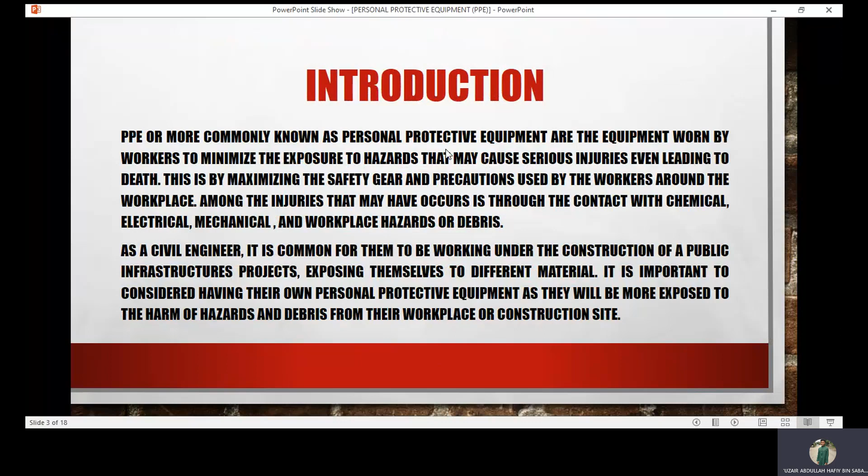As a civil engineer, it is common for them to be working under the construction of public infrastructure projects, exposing themselves to different materials. It is important to consider having their own personal protective equipment, as they will be more exposed to the harm of hazards and debris from their workplace or construction site.

So here are the types of personal protective equipment, that is PPE. First is the safety helmet. Second is the protective gloves. Third is hearing protection. Fourth is the full face shield. Fifth is safety goggles. Sixth is respiratory protection. Seventh is the safety boot. Eighth is protective clothing. Ninth is the reflective vest. And tenth is fall protection equipment.

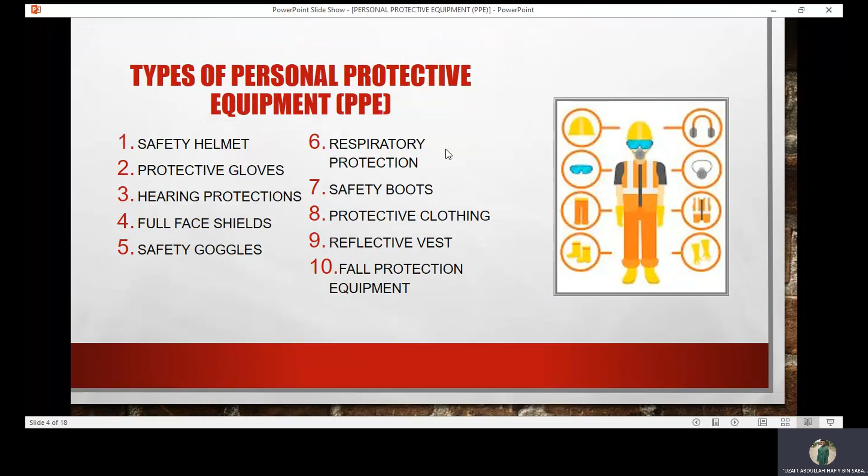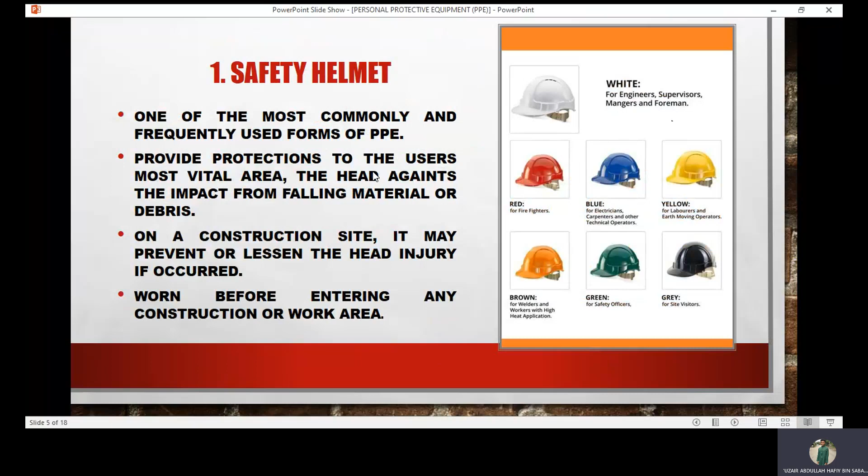First is the safety helmet, one of the most commonly and frequently used forms of PPE. Many engineers wear the white type of safety helmet, as it represents engineers and provides protection to the user's most vital area, that is the head, against impact from falling material or debris. On a construction site, it may prevent or lessen head injury if occurred, and it is worn before entering any construction or work area.

Next is the protective gloves, which are designed to keep the user safe from hazards of cuts, burns, crushing, or contact with any biohazards. It is worn during work or projects and covers and protects the hand from the wrist to the fingers. It works in saving one's hands from any sort of injury that may occur physically.

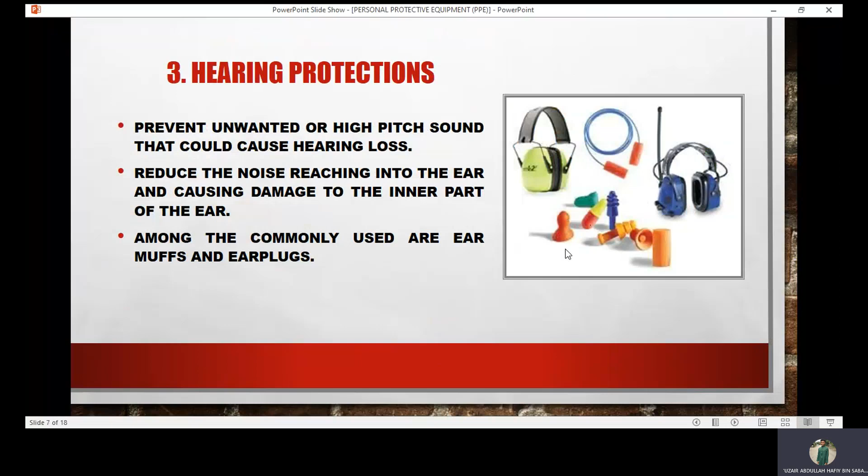Next is the full face shield, which works as a secondary protector intended to protect the entire face of the user against exposure to impact or hazards. It is used in combination with safety goggles to improve the ability in protecting the user's face. It is made with different transparent materials with varying levels of thickness in order to protect the face.

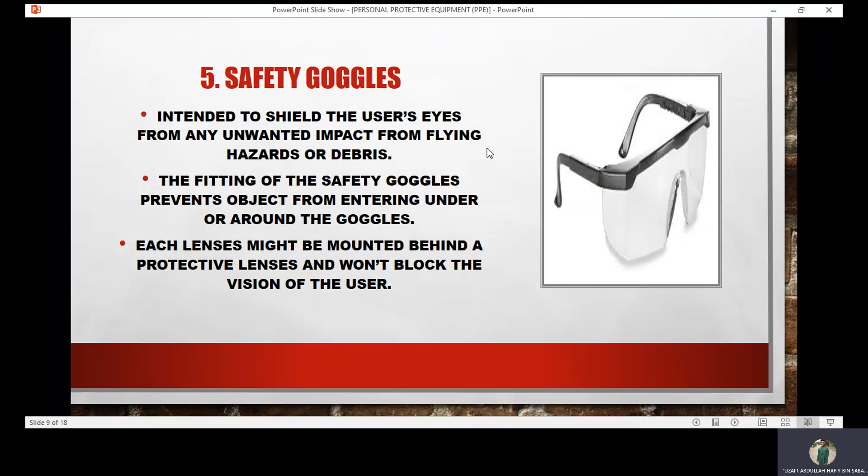Next is the safety goggles, which are intended to shield the user's eyes from any unwanted impact from flying hazards or debris. The fitting of the safety goggles prevents objects from entering under or around the goggles. Each lens might be mounted behind a protective lens and won't block the vision of the user. These safety goggles are worn together with the full face shield, as it could improve the safety ability.

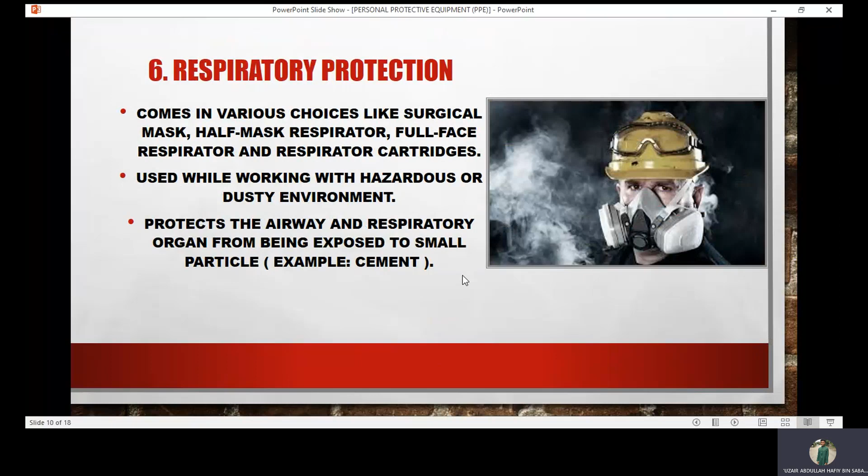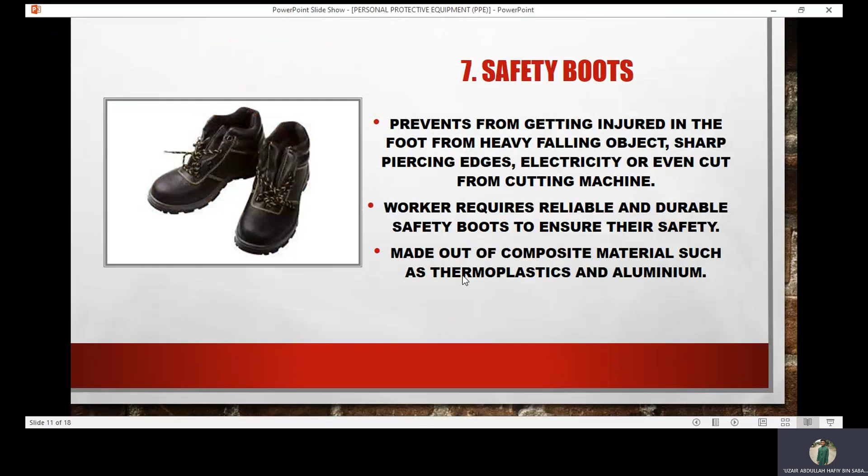Next is the safety boots, which prevents from getting injured in the foot from heavy falling objects, sharp piercing edges, electricity, or even cuts from cutting machines. Workers require reliable and durable safety boots to ensure their safety, and it is made out of composite materials such as thermoplastic and aluminium in order to make it more durable.

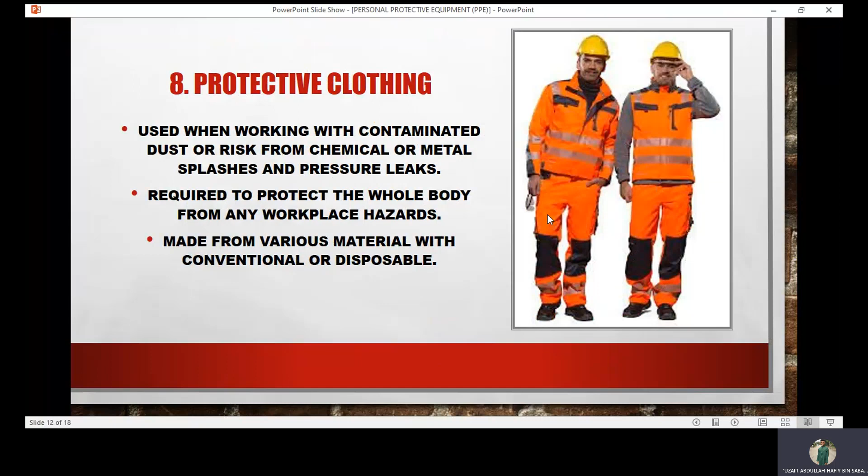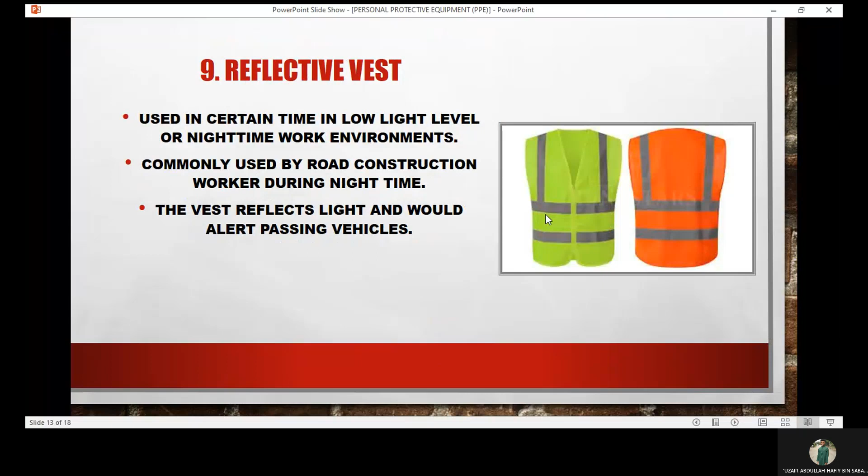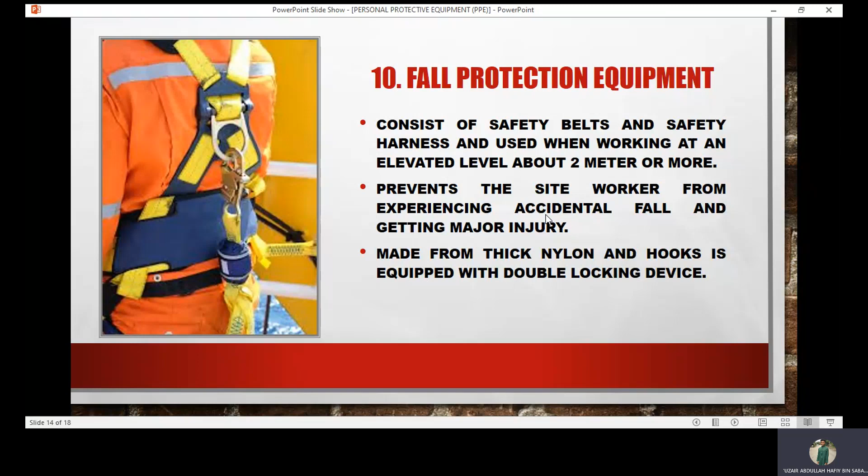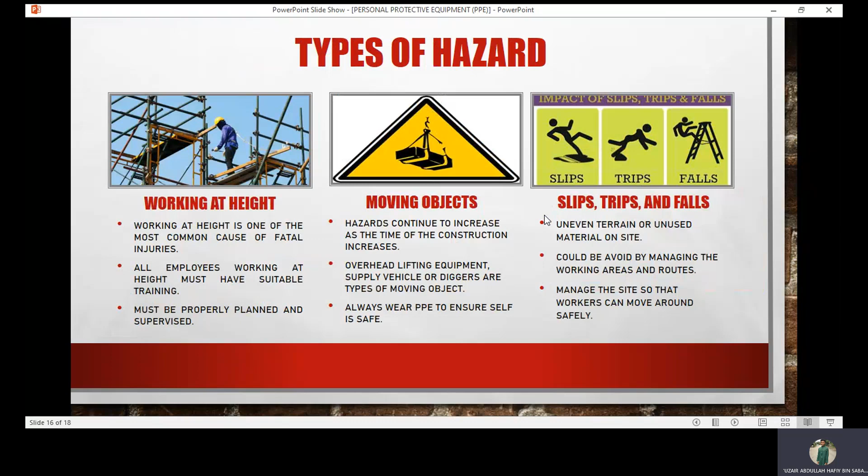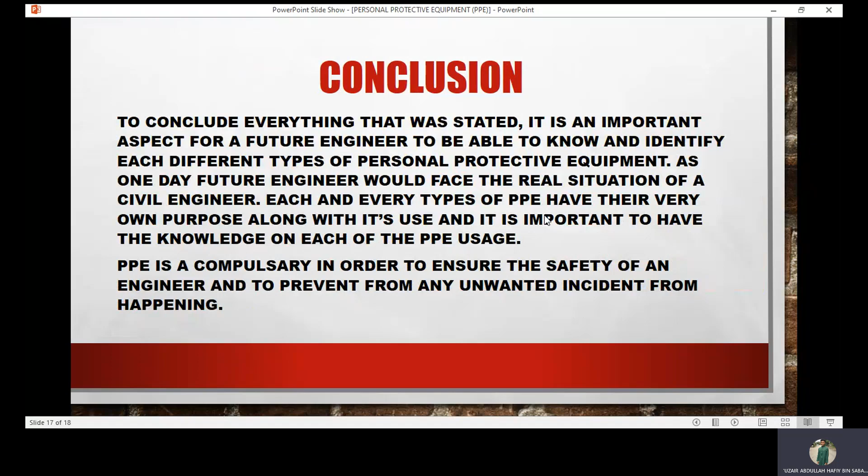So that is all for the presentation. Here is the conclusion: to conclude everything that was stated, it is an important aspect for a future engineer to be able to know and identify each different type of personal protective equipment, as one day a future engineer would face the real situation of a civil engineer. Each and every type of PPE has its own purpose along with its use, and it is important to have the knowledge on each PPE's usage. In conclusion, PPE is compulsory in order to ensure the safety of an engineer and to prevent any unwanted incident from happening.